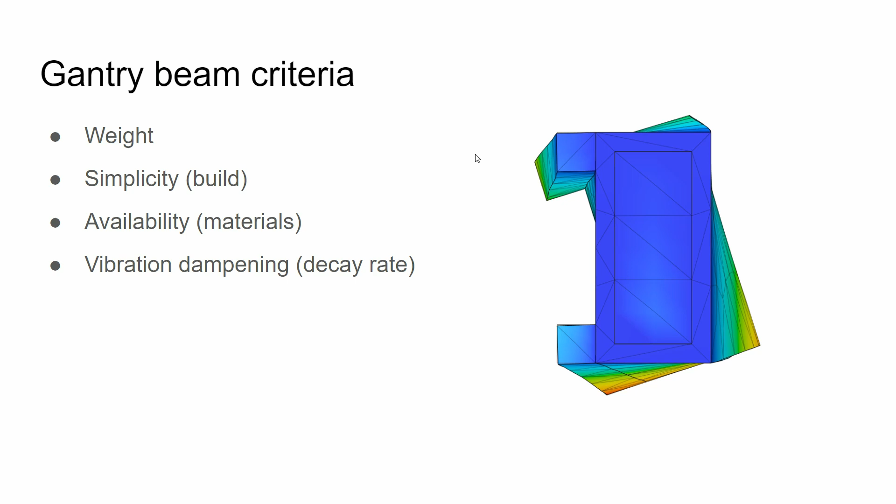Alright, the beams we're going to design today are the four most interesting beams, I think - perhaps there's one more that's pretty interesting. I've already designed all the beams, but I just felt like showing you how I did it and how I went about it, so that you can simulate your own beams as well.

You can see that all the beams, right now we're looking at the cross sections of the beams. All the beams have rectangles, and these rectangles represent linear rails, and they are 20 by 20 millimeters. And all the materials are aluminum, and this right here is epoxy granite.

Talking about materials, for beams that require some sort of processing, like drilling holes to install the linear rails, I'd like them to be aluminum because it's cheap and it's easy to work with, especially for us hobbyists at home. Alright, let's get to it, let's jump into Fusion 360.

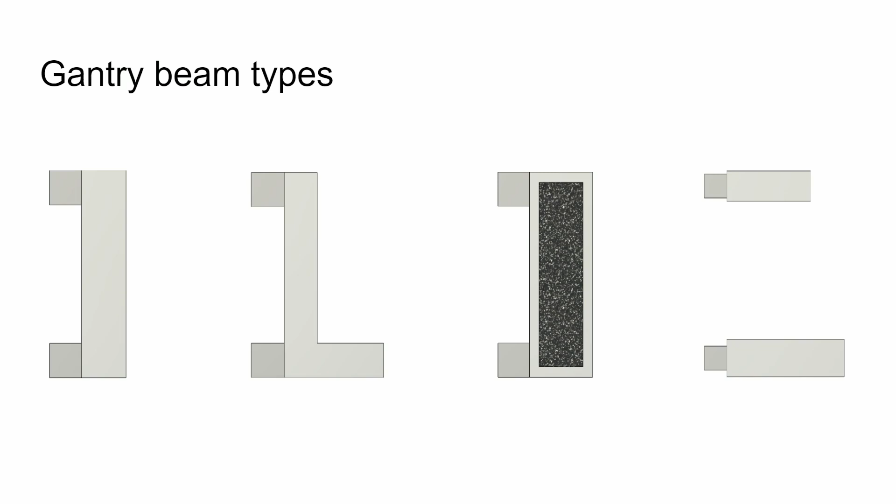Okay, I've gone ahead and saved the file, and we are ready to start sketching. So I'm just going to go ahead and draw the cross section for the first beam.

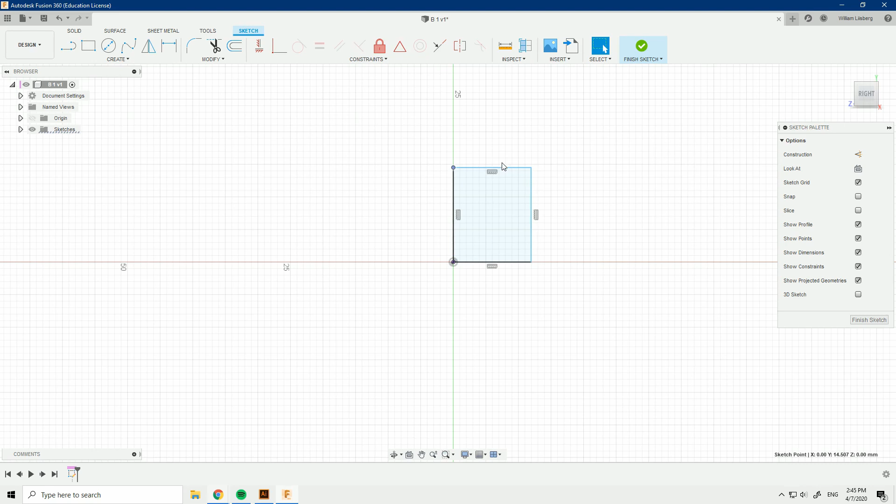One important thing to note, a little tip, is to create your beams so that they are centered in the origin, so that you can mirror rails and other features around on the part without creating extra work planes. So I'm going to go ahead and find the center rectangle tool, and I'm going to draw the cross section.

And I know the dimensions, it's 120 by 20 millimeters - no wait, by 25 millimeters. Alright.

So another thing I forgot to say is that the dimensions for all the beams will heavily depend on the availability of the material. So that is also going to be a limiting factor in our design, because we wouldn't want to end up with something that we cannot buy.

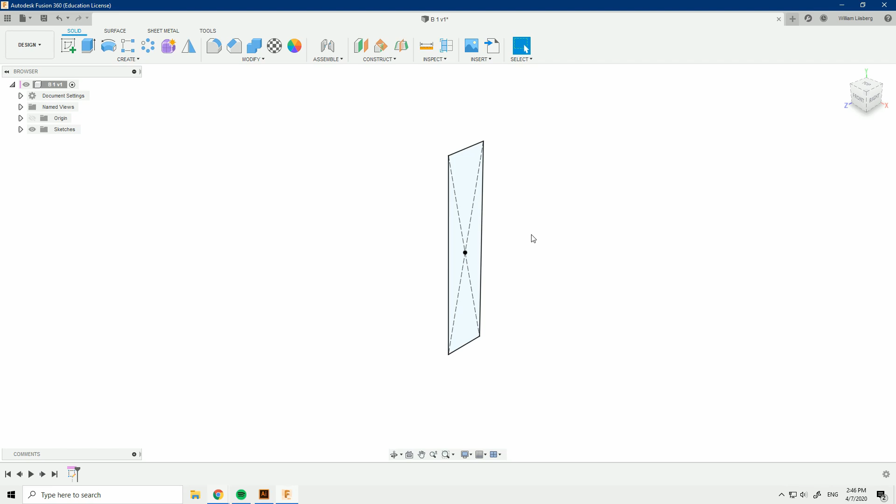All the beams are going to have a length of 600 millimeters, and remember that thing about making the part at the origin - well, we can actually create a symmetric extrusion, and first off it's going to be half of the length. That means it's 600 millimeters from here to here, which we don't want. We want the entire beam to be 600 millimeters, so I'm going to go ahead and press whole length.

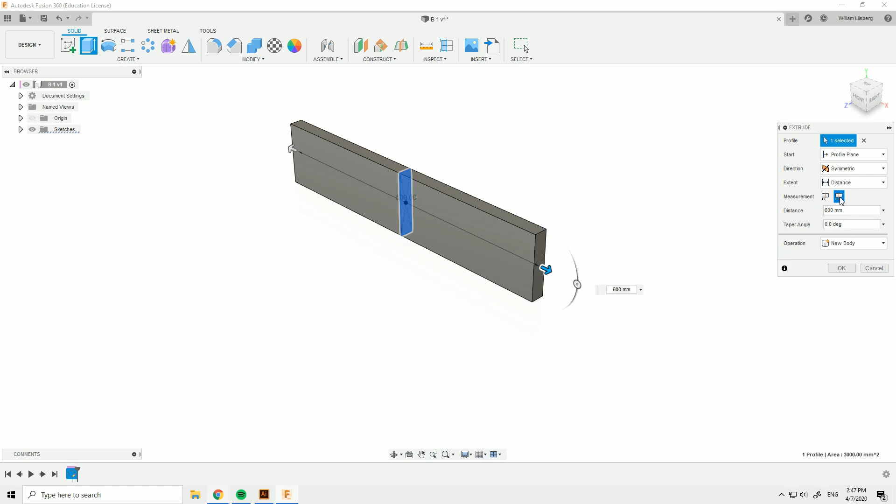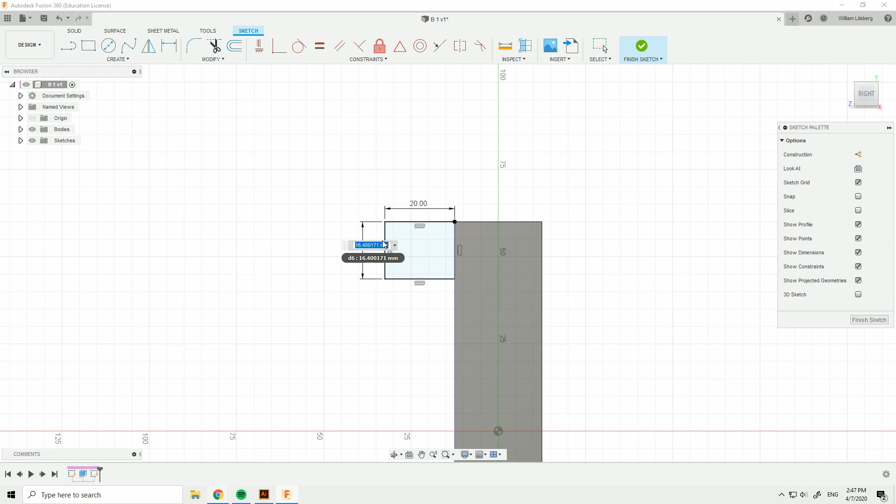Next up is modeling the linear rails. I know they are a bit simplified as rectangles, but for these kind of simulations, we are not looking for the exact result - we're just looking for something that's rather close to what the real world stiffness and deflection would be.

So I'm going to go ahead and extrude that, and instead of making this 600 millimeters, if I later on decide to change the length of the beam to 700 millimeters, I'd have to go back and change this as well, and if I forget that, we could have some kind of error.

So there's multiple things I could do. I could go back to our first extrusion. I could hover over this little text box for the distance, and as we can see, it gives us a variable name, that's D3. That actually means that if we enter D3, our value of 600 millimeters is stored in there.

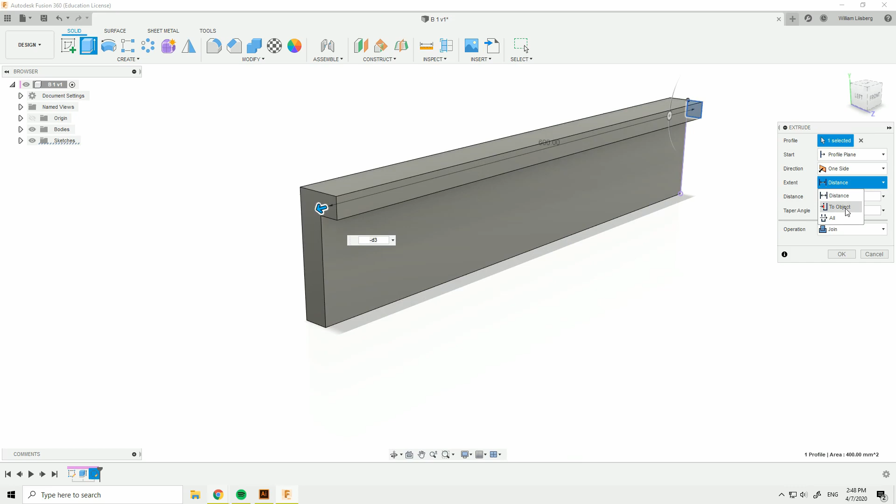So I could go ahead and extrude this one again, and I could enter minus D3 to get it in the correct distance. Another thing I could do is extrude it up to a face - that's usually what I do. So I'll just have to select the face right there, and it extrudes all the way 600 millimeters.

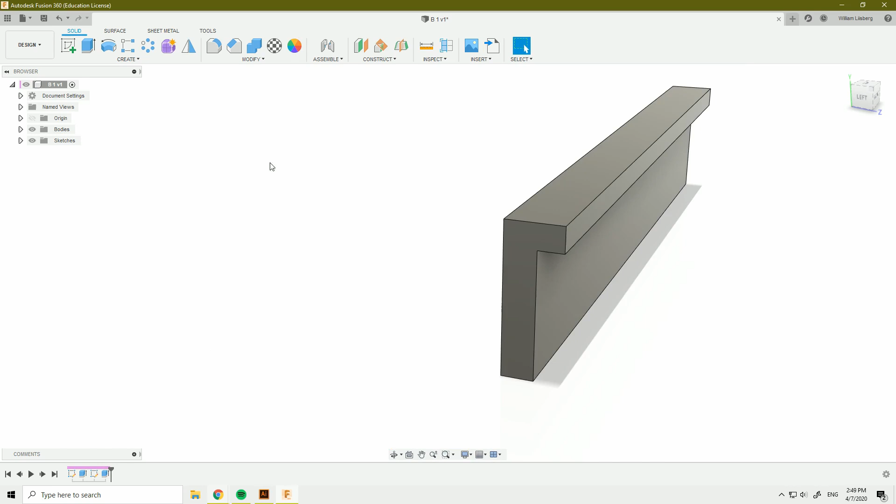And this will update as well if we decide to change the whole length of the beam. Alright, as you can see, it connects to the body, and that means that we cannot apply a separate material to our rail. So I'm going to make it a separate body by pressing new body under operation.

We need two rails, of course, so I'm going to mirror the first rail. I'll find the mirror tool, and usually the mirror tool goes to faces by default, so we can only select faces. We don't want that. We actually want to mirror the entire body, so we can select bodies, and now we can select the whole body at once.

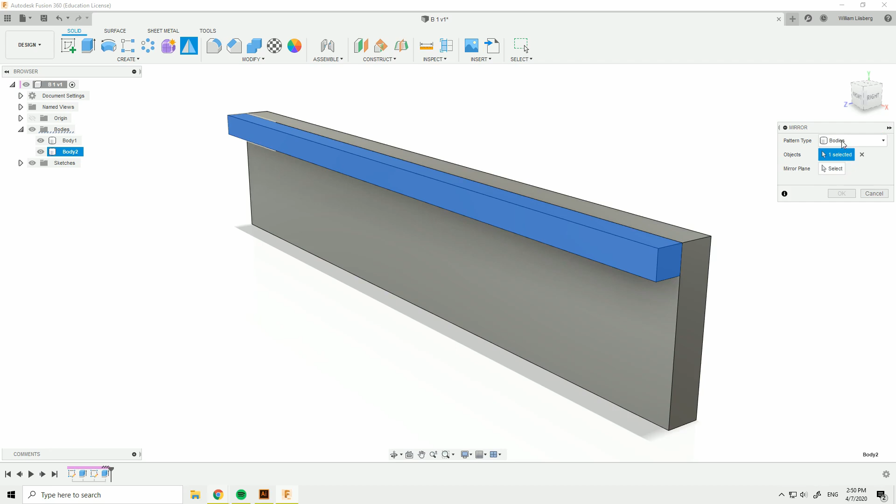One thing I prefer to do, which is also more efficient, is selecting whatever we want to mirror first. That could either be the body or the extrusion down here in our timeline. Now if I select the body first and then press the mirror tool, you can see it has selected bodies instead of faces automatically, and that saves us those two little clicks.

Alright, I'm just going to mirror that around the origin mirror plane, right there, and press OK. Now the first beam is almost ready.

We just need to apply our materials, and I've pinned my materials up here, but if you don't, you can find it under the modify section. If you press this little setting icon, you can pin it to your toolbar, and it should appear up here.

Okay, for the materials, we are going to apply stainless steel for the rails, for the linear rails. No, they're usually made of hardened steel, but the Young's modulus, basically the stiffness, is so close that it's not going to matter that much anyways, so steel would be fine.

And then aluminum, I'm not going to select the default aluminum because I know what type we will be using. We will be using one of the most common types, and that's 6061 aluminum. And that's hugely popular because you can machine it.

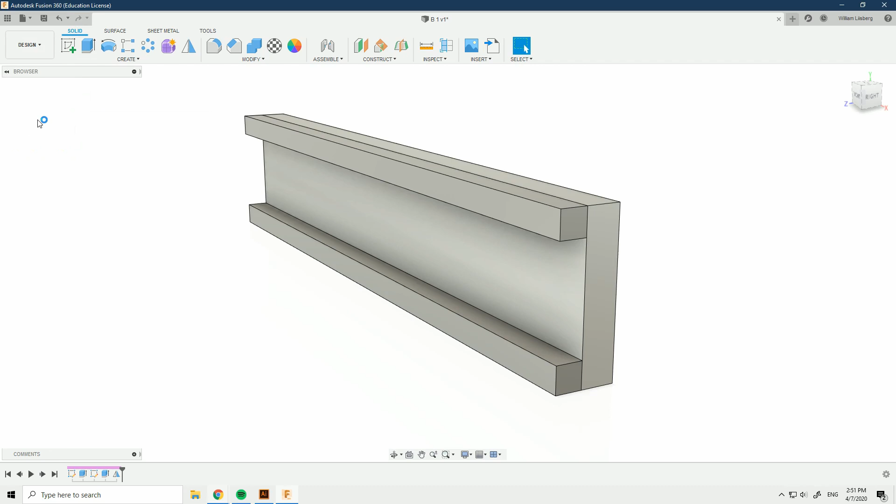Okay, now we are ready to insert the simulation workspace. And I will double click on static stress. That is the type of simulation that we will be doing in this video. And right here we have our simulation workspace.

Today we will mostly be looking at the materials section, the constraints and loads, and then the solve button, and of course the results, which gets us to a different set of tools in the toolbar.

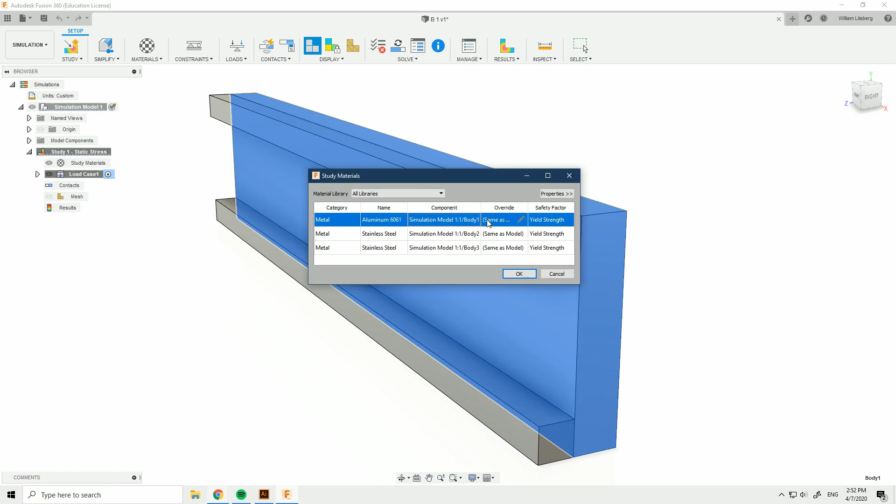Okay, if you're unsure that you have selected the correct materials, what you can do is go to the materials section, and you can actually also edit the materials right here. You should be able to do that. Oh, and we can see the properties. Didn't know that. That's really handy.

Yeah, so you could see that the Young's modulus for stainless is 193. For hardened steel, it's usually about 200, or perhaps a bit more sometimes.

Okay, I'm going to give this beam some constraints so that it behaves the way it would on a machine. And on a CNC router, these faces would be bolted to some sort of leg for the gantry. So we're going to fix those.

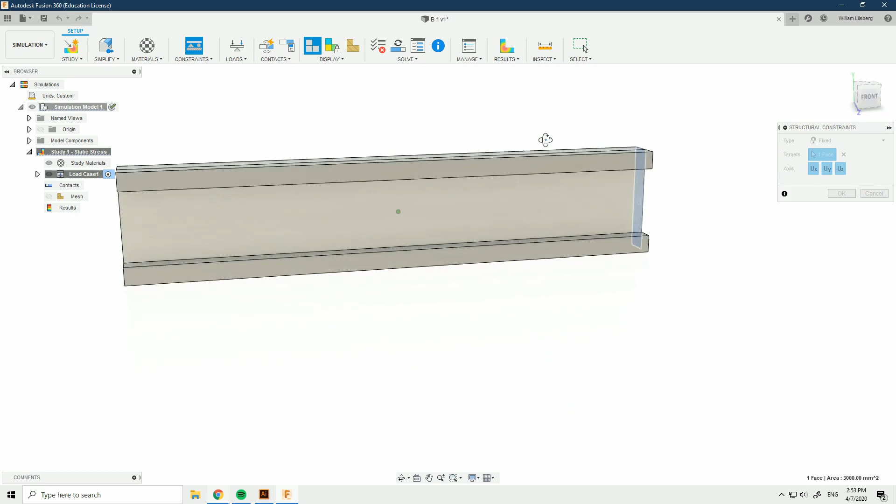And I'll just press the constraint, and then we can select the faces. As you can see, this little lock appears, and that means that it's fixed, as the type is selected right here. You have different types, but we're not going to talk about that today. I'm going to press OK, and now we are ready to enter some loads on this beam.

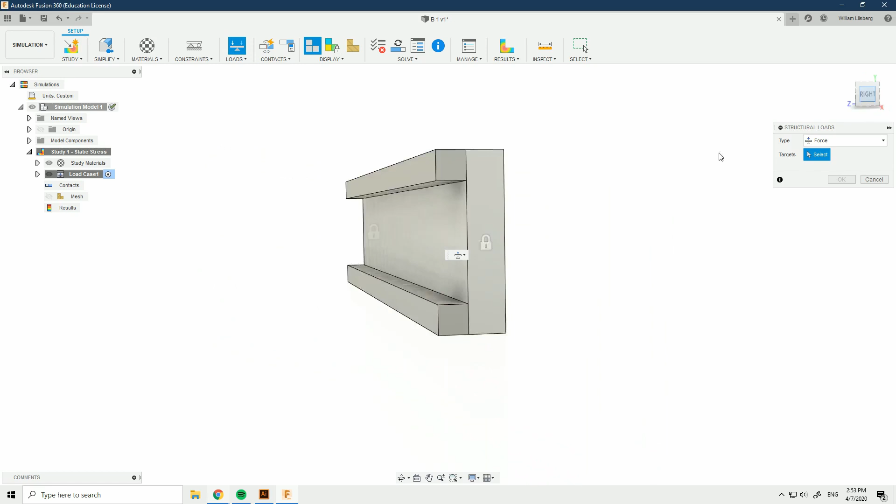Okay, if we look at this beam from the bottom, and if we put up some sort of Z-axis here, you can see that the load while cutting would come from down here. So we want to simulate that, because that induces some different kinds of stresses compared to just making the loads come straight on the rails like this.

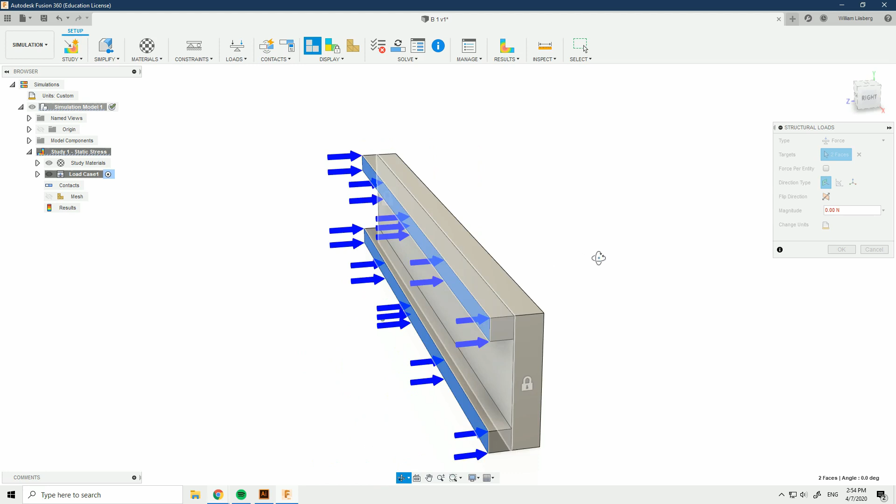So I'll select my two faces, that will be the linear rails that the force is going to be applied to in the real world. And then I'll select remote force, and drop it down 150 millimeters. The force we will induce on this beam will be 1400 newtons, and that is almost 140 kilos. So that's quite a lot.

Okay, now we have all our parameters and constraints entered, and we are ready to simulate.

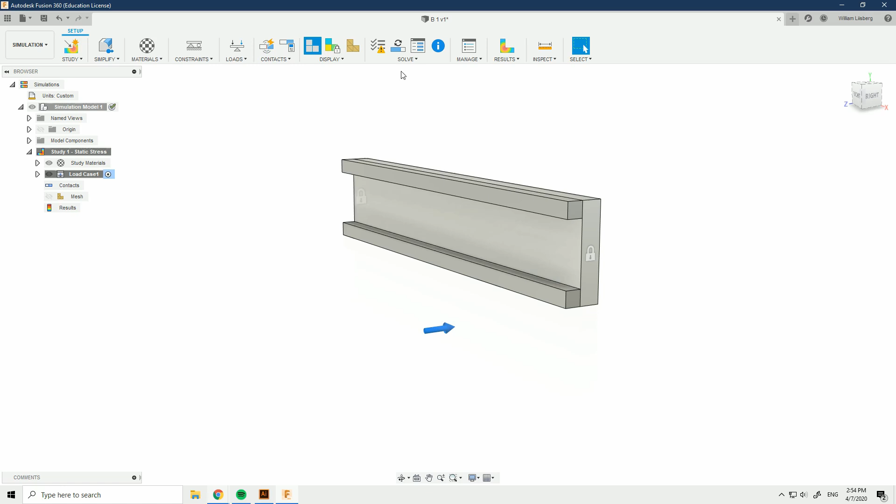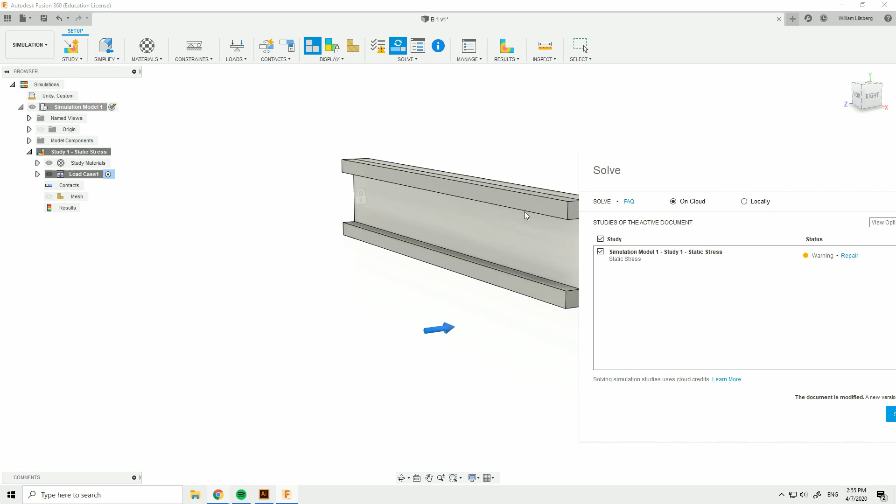I'm just going to go ahead and press the solve button, and this little menu appears, and you could either solve it locally or on the cloud. If you do it on the cloud, it's going to take a few seconds to send this model to a server and receive the results. But because this model is so simple, it's actually going to be quicker for me to solve it locally, and that might also be because I have a decent computer.

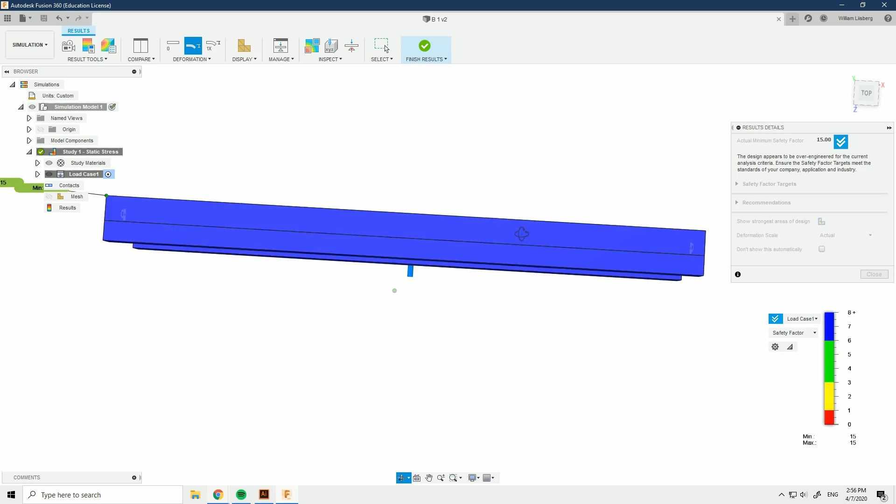When you have solved your beam, you will enter the results section automatically, and you can see our constraints and material section has disappeared, and we are presented with some new tools. The first thing that could be pretty handy is the deformation, which basically adjusts how much our beam would move under the applied load. This one is undeformed, and we have actual, which is how much it actually moves - that's hard to see because it moves so little. Then we have adjusted, which basically overdoes how much the beam deflects.

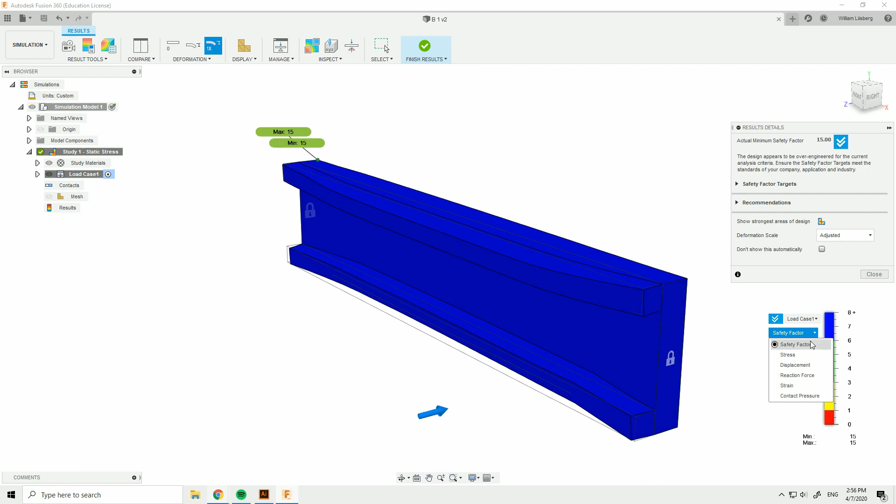Right now we're looking at the safety factor, but we don't want to look at that. We're actually mostly interested in the displacement, meaning how much the beam has moved. The first thing I note is that it's not uniform - I'm not sure what's going on there, but I'm not interested in the result we have right here with this probe.

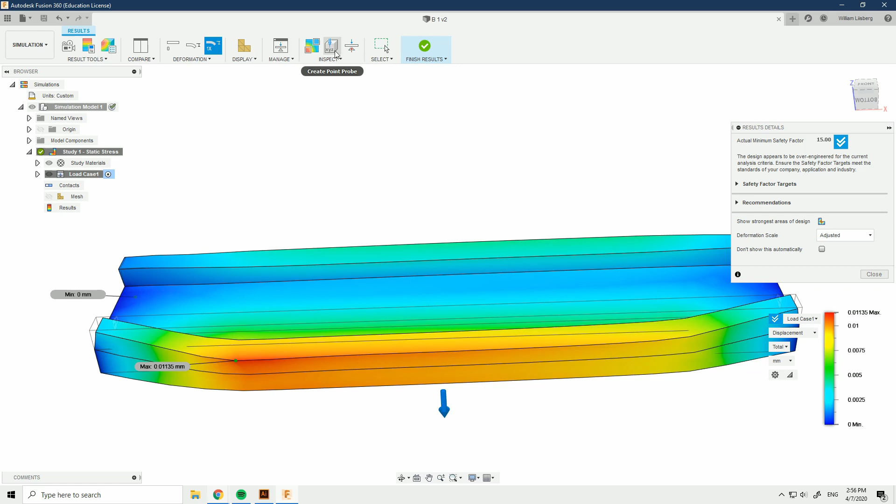I'm going to go ahead and create a new probe under the inspect section, and apply that somewhere in the middle of the beam, and there we have our number. We can see that under a load of 1400 newtons at a distance of 150 millimeters down from the center of the beam, we get a deflection of 0.01 millimeters.

Now this is where it becomes really interesting to have FEA available to you, and FEA stands for Finite Element Analysis, which basically means computer simulations, as we're doing.

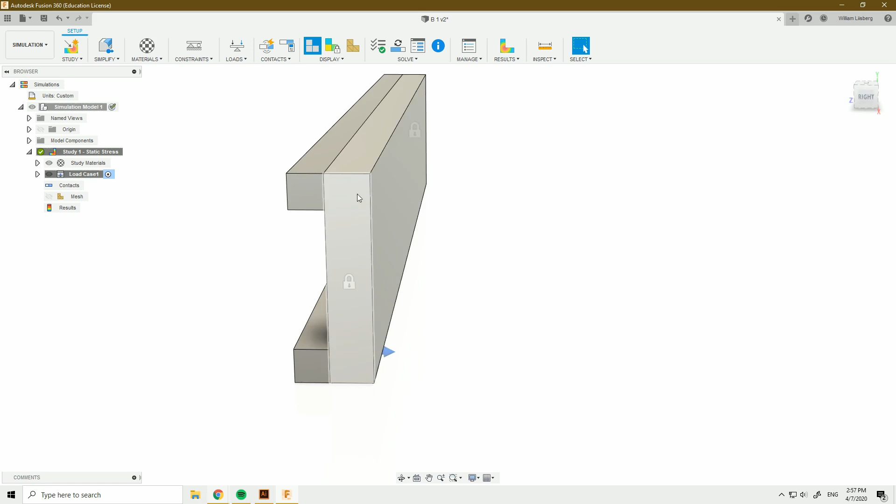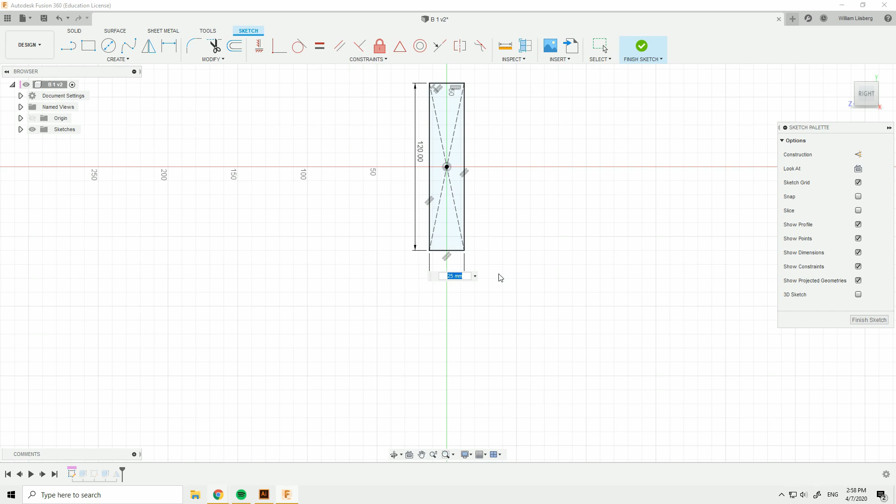This is really interesting because if you're wondering how much stronger this beam would be if we made it 5 millimeters thicker, you could easily do that by going back to the design suite and just change the thickness. Or perhaps we could make it 20 millimeters if you wanted a machine a little less capable but a little lighter and cheaper to build.

Then we could go back into the simulation workspace and resolve the whole setup. All we have to do is press the solve button again, because we have already fixed the two ends and our load is still here, the same, and still applied to the rails. So I'm just going to go ahead and solve this again. And there we go - now we can see that we have a little more displacement.

I believe this one has 0.003 millimeters more deflection, somewhere around there. So that's pretty interesting to see how much more deflection we get when we make the beam 5 millimeters thinner. Now I don't want to use this result, so I'm just going to go back in and redo what we had before - it was 25. I'm just going to simulate that again. And there we go, now we are back with our original results.

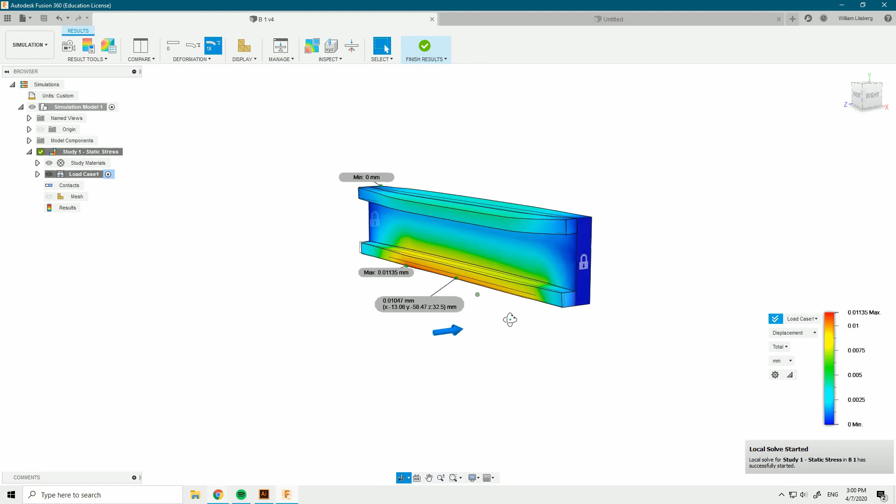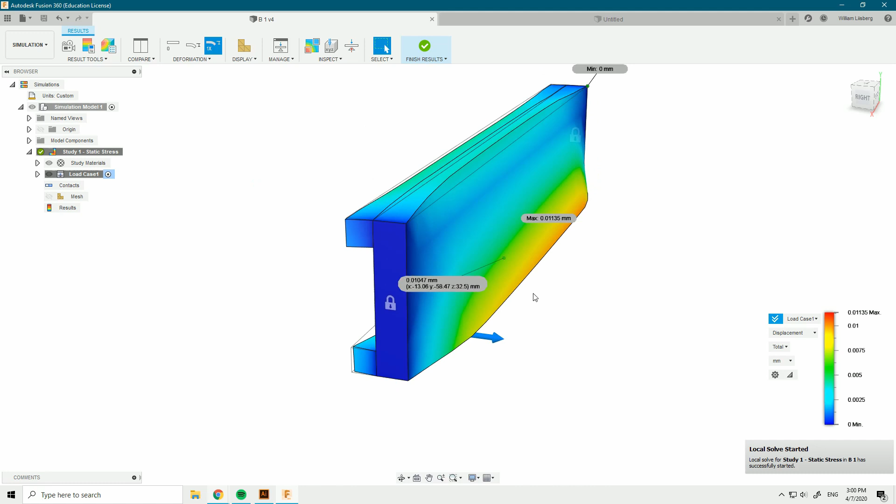Okay, let's go ahead and create the next beam. Looking at the first beam, I can see that we have a lot of displacement down in the lower area of the beam. So I think it would be really interesting to see what happens if we make an L shape, hoping that some extra material right here in the back would create less deflection. Let's go ahead and do that.

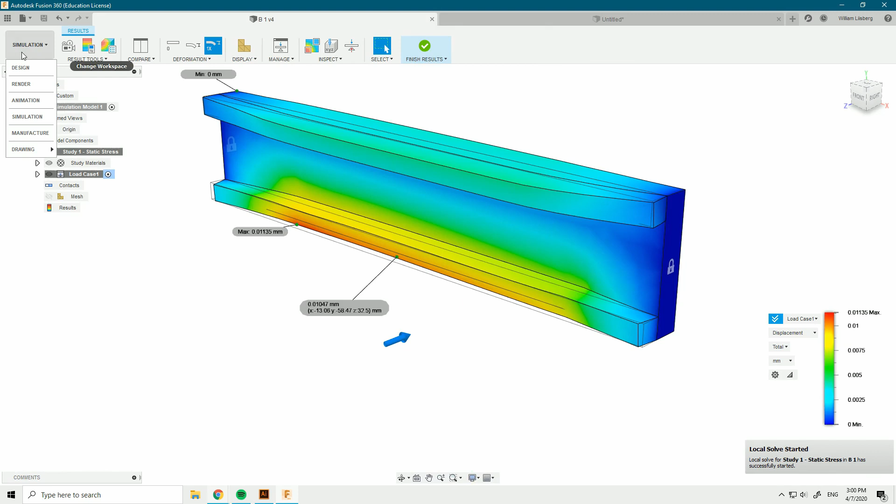Now, in order to make this fair, we are going to make it so that the cross section has somewhat of the same area as the cross section from the first beam. I'll go back here in the design, and I want to make this area the same as the area in the L shape. If I click on anything, a length or a face, I can see a measurement down here in the lower right corner, and it tells us that this has an area of 3,000 square millimeters. So we're going to aim for that.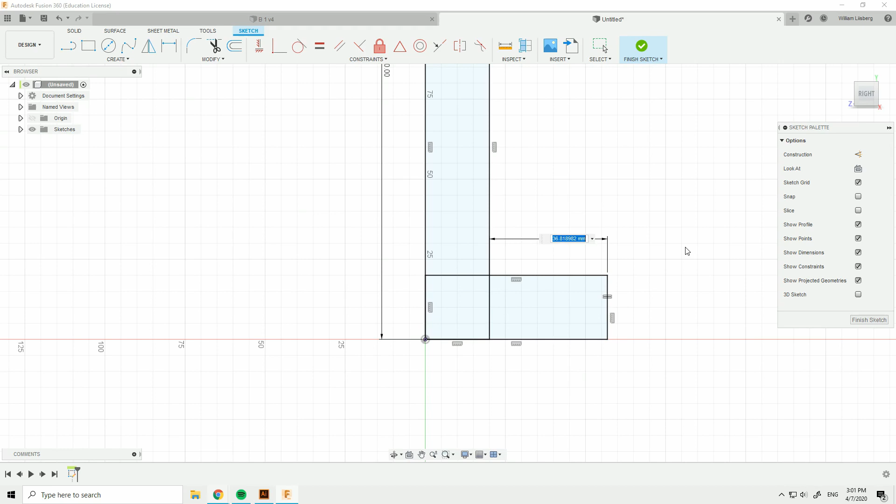I'll create the L from two rectangles, and I'll make both 20 millimeters. It should be 120 millimeters high, and we will make the bottom 40 millimeters. Where does that leave us? Let's see.

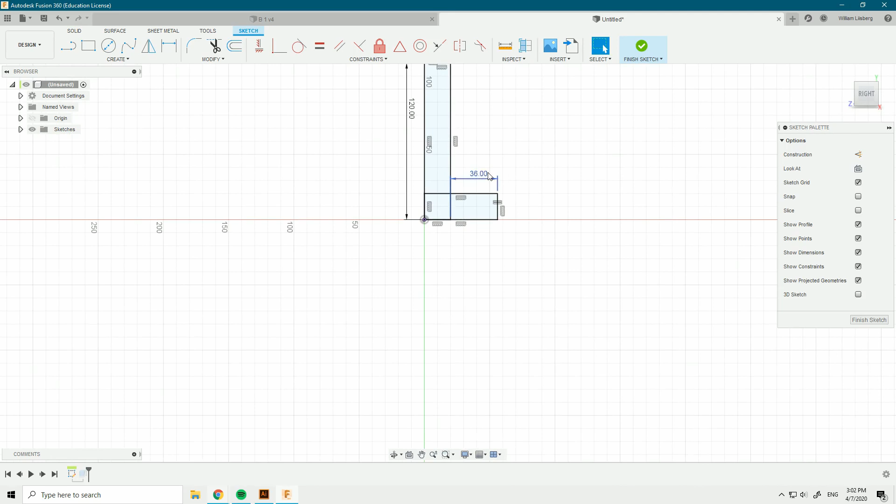This beam will of course be 600 millimeters as well, same as before. Now let's see the area for this cross section is 3,200. So perhaps we could make the leg of the L, if you will, a bit shorter. Let's try 36. A little better, perhaps 32 millimeters. Yeah, that's almost spot on, that's almost 3,000 square millimeters.

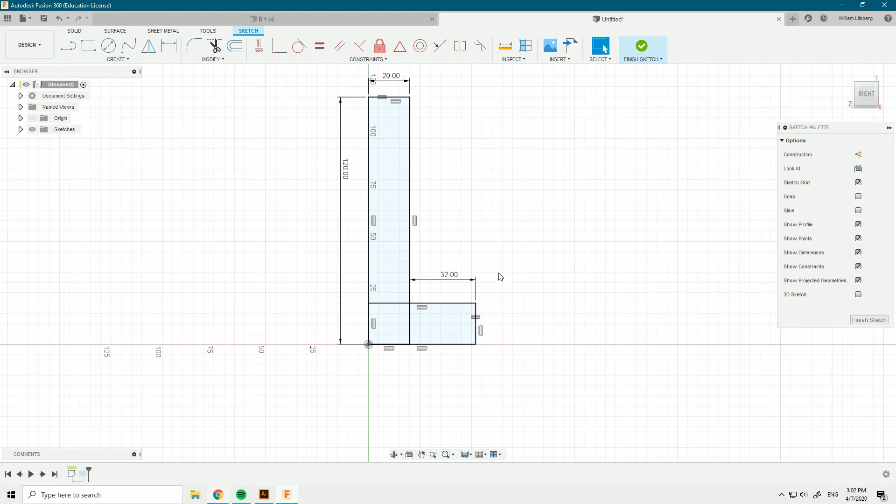Now I think this looks a little funky. I intuitively think that the bottom of the L should be a little longer. So what I'm going to do is make this a little thinner instead, and then make it longer. I'm going to delete our constraint here that makes this side equal to that side, and make it 15 millimeters, and then we can make this one a little longer again. Yeah, there we go, exactly 3,000 square millimeters. That's great.

Okay, I'm just going to go ahead and save this design as well. You cannot simulate anything unless you have saved it.

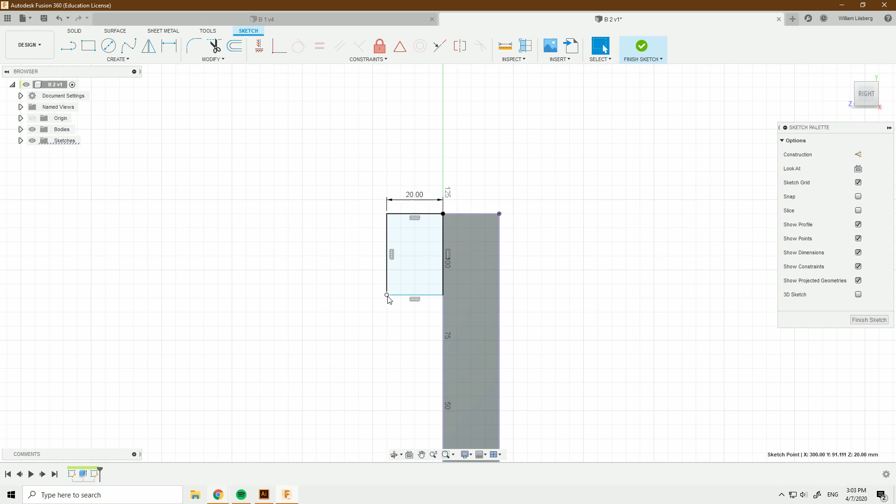Now we need to create our linear rails. I'll press R for rectangle, and I'll make this 20 millimeters. Now instead of making both sides 20 millimeters using the dimension tool, one thing that would be a little cleaner is to make the sides equal by using the constraints available up here. That just saves us a dimension, and then if we want to change this, it updates both sides, which is handy.

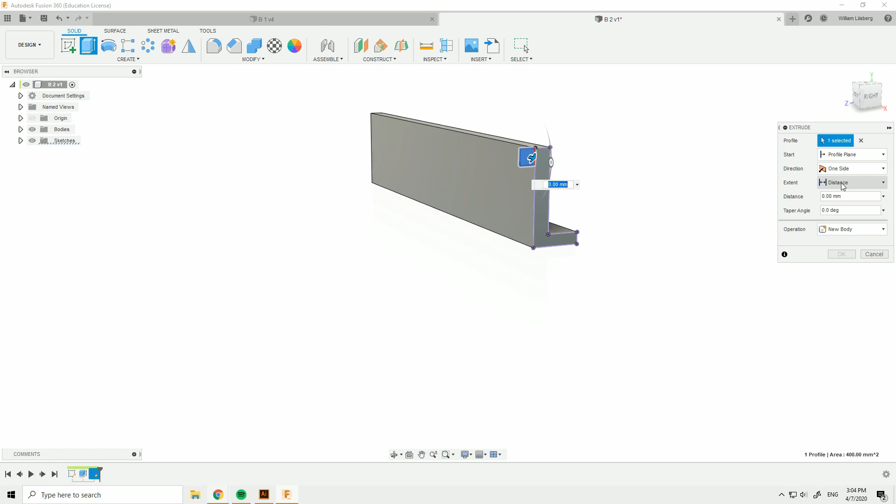Okay, now one thing I forgot to do is make it symmetrical. So our beam is not symmetrical, it's not centered on the origin. So if I want to mirror this part, I'd have to create a new work plane.

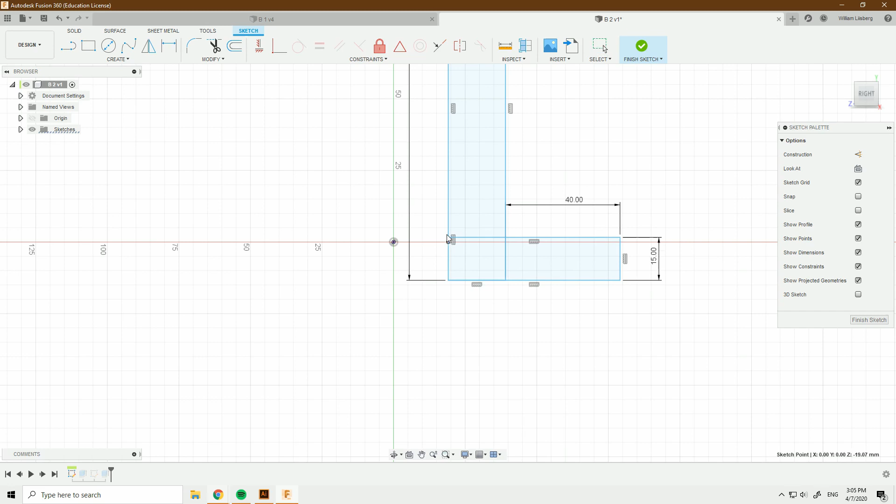I'm going to show you that. So what I'm going to do is go back into our sketch and make everything symmetrical. I'll just click on the origin here, and delete all these constraints. I'll select this, and reconnect what needs to be reconnected. There we go. And I'll use the midpoint constraint, which basically connects the middle of this line to this point. So we're going to use that, and go ahead and press OK.

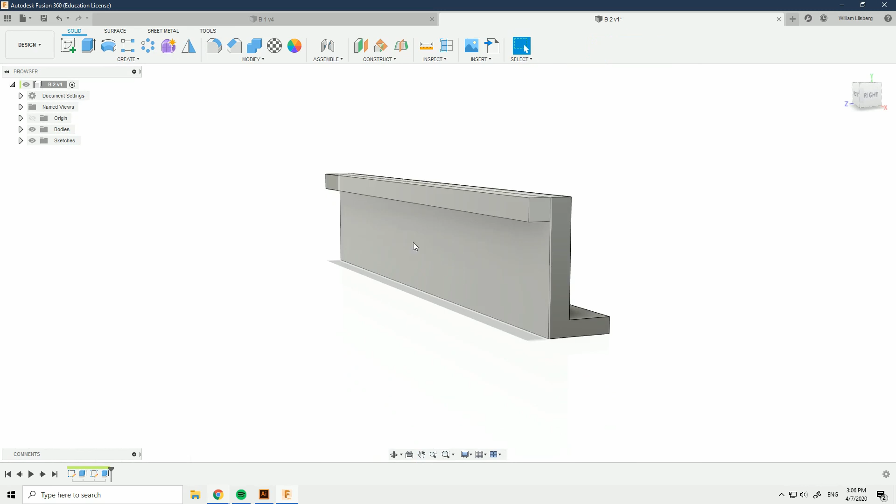Alright, now we can mirror our rail, and I'm going to select the rail before using the mirror tool, if you remember. And then I'm just going to select the correct origin plane.

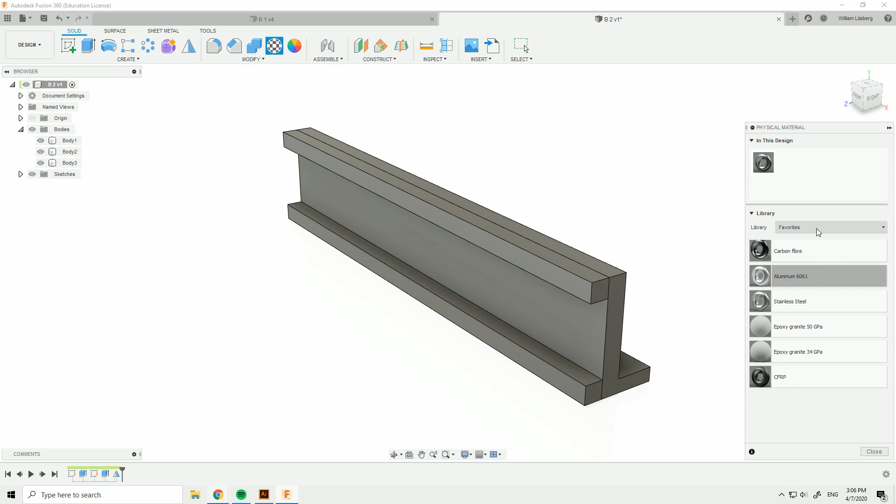Now we're ready to apply our materials. So I've actually saved our materials under my favorites library. I'm just going to go ahead and drag and drop the required materials and then enter the simulation workspace.

Okay, the setup is going to be the same as before. So I'll just fix the ends. One thing that is important to remember is that we don't want to fix the linear rails, because they're not going to be fixed to the legs of the gantry. It's hardened steel, so we're not going to drill and tap some kind of hole for a screw to go in. So I'll only select the ends of the main body of the beam.

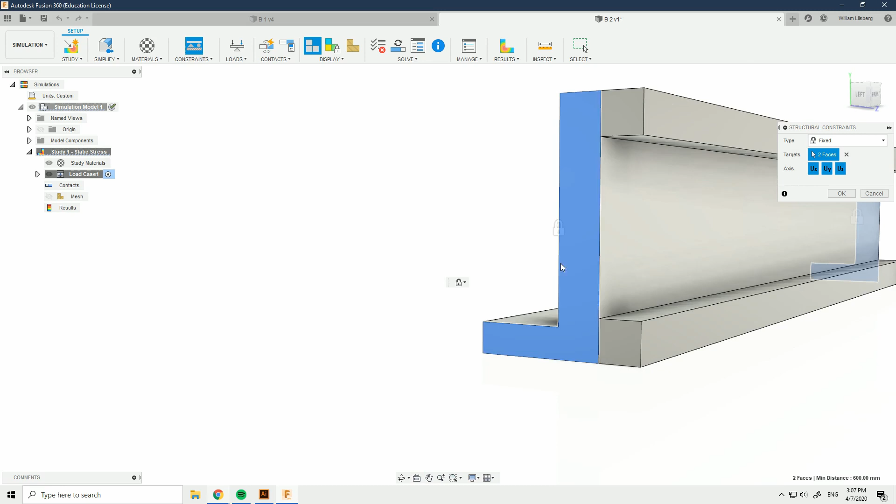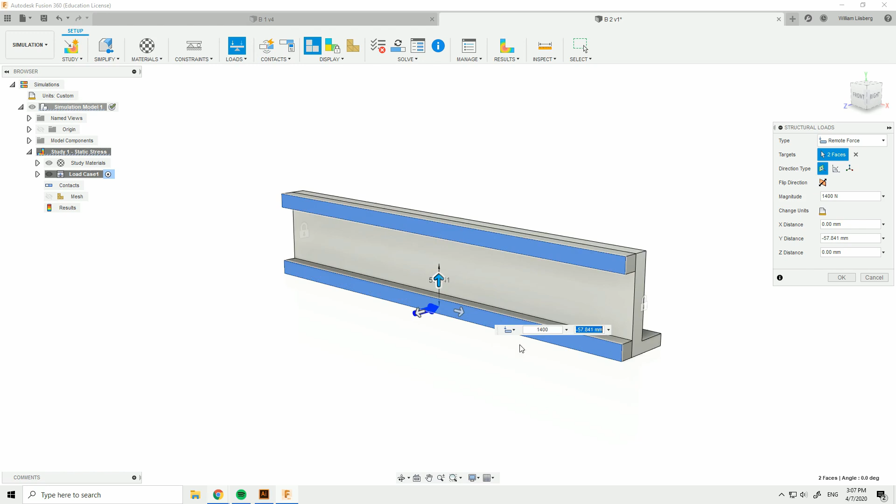And if you wanted to verify that we have the correct materials, you could check that in the materials section. I'll go ahead and apply our loads, and I'll select the rails, and make it a remote force, same as before. Remote force of 1400 newtons at 150 millimeters below the center of the beam. And now we are ready to solve.

Okay, now the next beam is going to be really interesting. The next beam will be a hollow profile, and it will have the same dimensions, 40 by 40, and I'll make this 10. Okay, this looks a bit weird, I'm going to make it a little wider. That looks more like it.

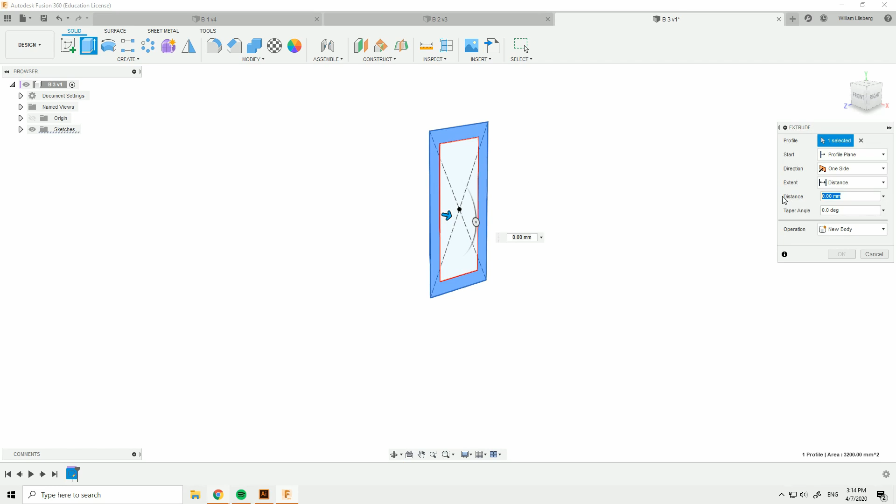This beam is going to be really interesting, because it will be filled with epoxy granite. And what is epoxy granite, you might ask? Well, epoxy granite is kind of like cement, but with a few different extras in it. It's a mix of materials blended together, and then they're held together with like 20% or 15% epoxy. And what this does is that it's really great at absorbing vibrations, which is very desirable for our gantry. So it's a quite good material for the application.

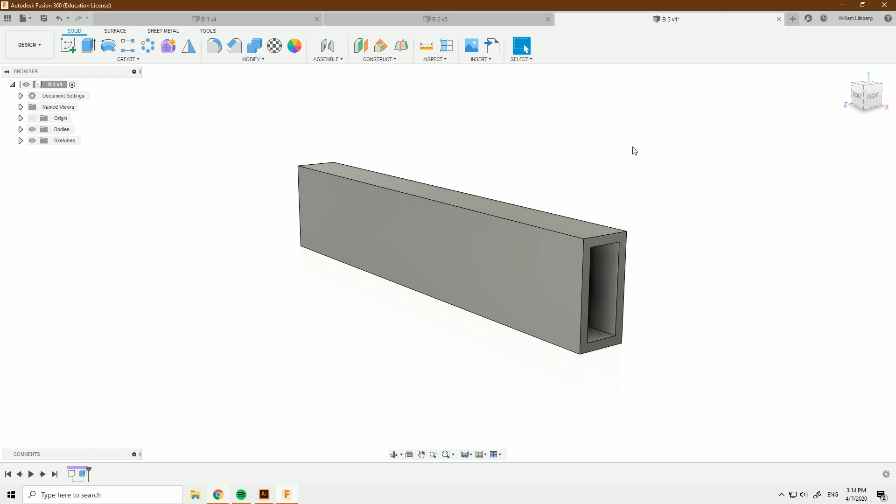Another thing is that the epoxy granite also adds a bit of stiffness. So I decided it would be a good idea to simulate a hollow profile, and then fill it with epoxy granite and see what kind of results we get.

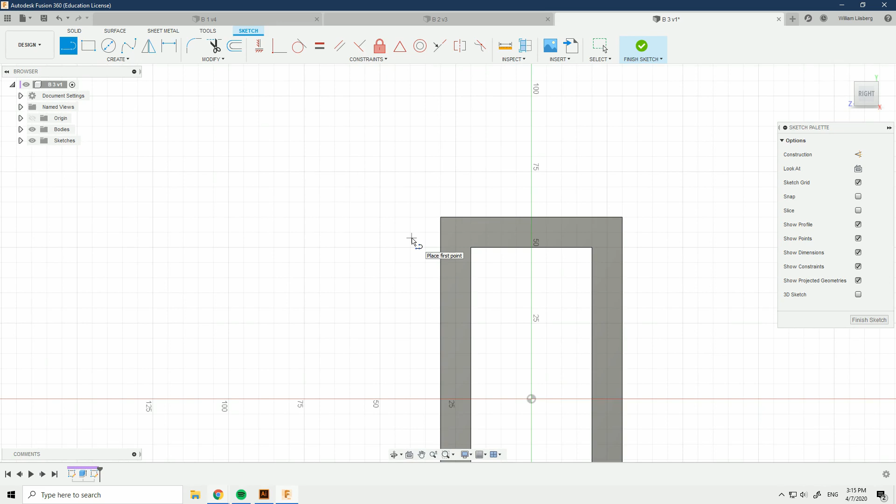So I'm just going to go ahead and create the linear rails as well. I'll make those really quickly, 20 by 20. Okay, and I'll just press Q from the sketch environment, and it throws us straight into the extrude tool. There we go, and I'll make it a new body. And now we can mirror it. I'll press the mirror tool. Alright, there we go.

Now we want to model the epoxy, and one thing many of you guys might do is just create a sketch and project the geometry to get this section right here.

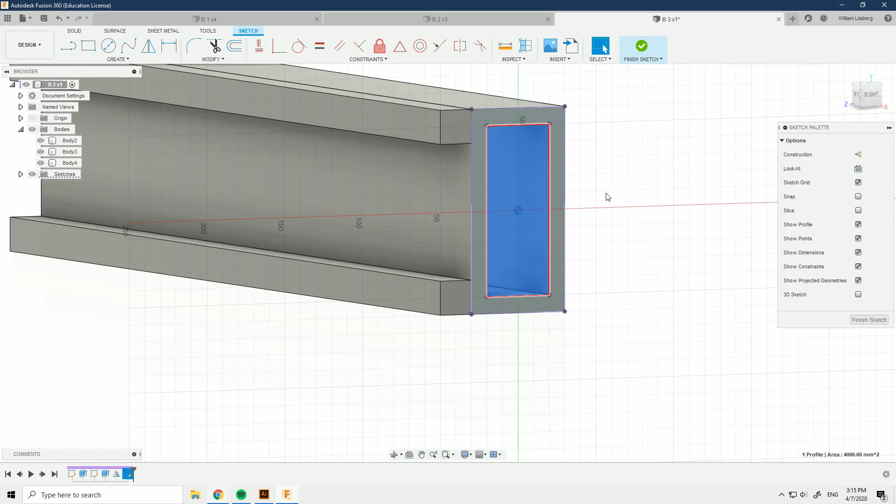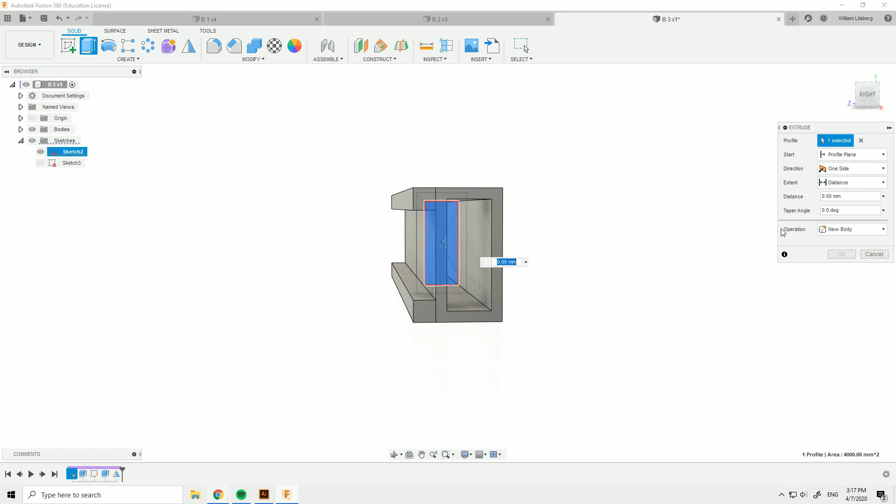Another thing I would suggest is to reuse our first sketch by going under the sketches and pressing the visibility icon to make it reappear. Then we can select it and extrude it up to the end, making it a new body. We actually wanted to extrude up to both ends, so I'm going to select symmetric.

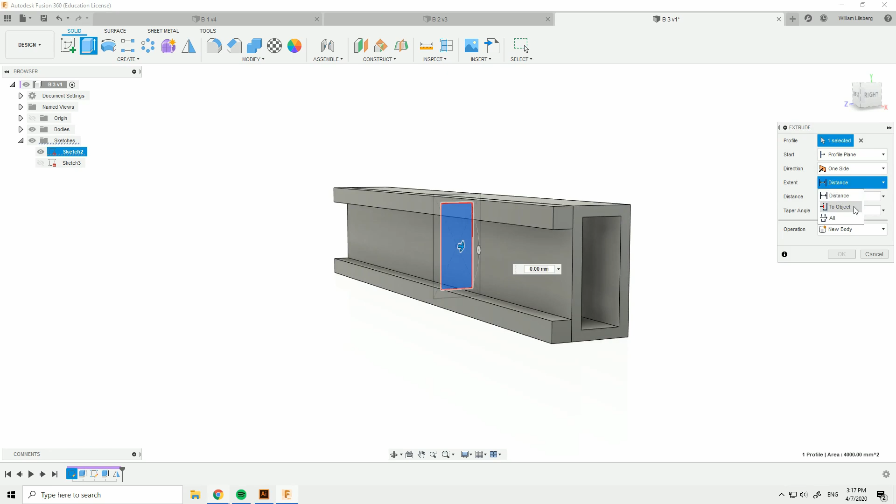Another thing you could do instead is go in and extrude, selecting the first face right here. You could select 2 sides, so extruding to 2 sides instead of symmetric. Then it asks how long the next side should be extruded, and we want to make that up to a face as well, that face being the other end.

So they're both eligible solutions. The last one with 2 sides is usually more for a different scenario, but it works as well right here. Usually I just go with the symmetrical, that's a bit faster. Then we can go ahead and apply our materials.

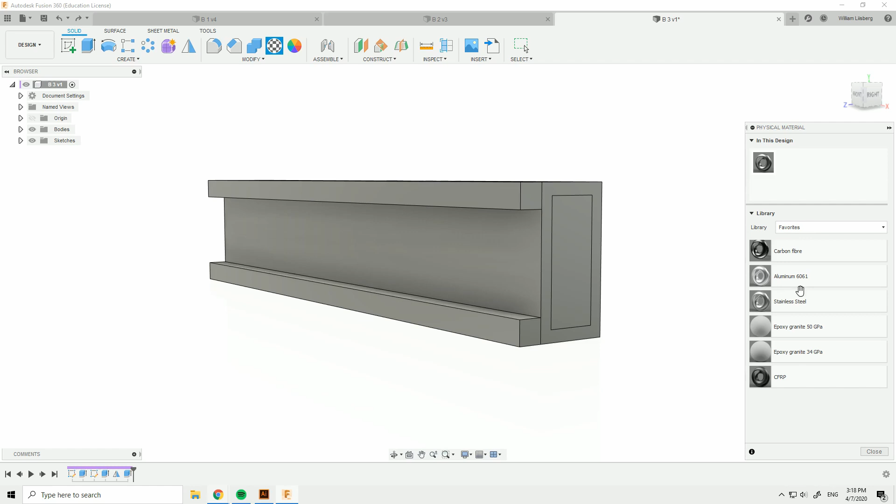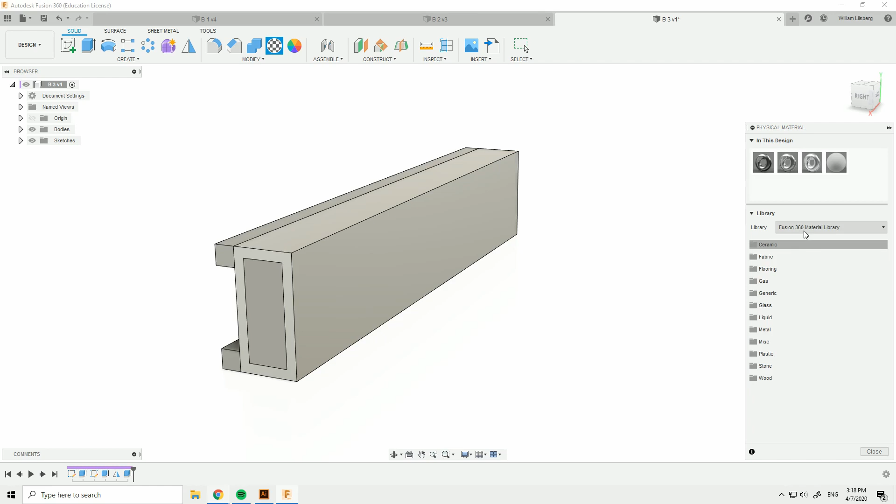Now you're probably wondering whether or not you can apply epoxy granite, and I'm going to tell you that it's not a part of the standard material library. Like you can see right here, you will not be able to find it. They do have granite, but not epoxy granite. So what I've gone ahead and done is created my own material.

If you want to copy my epoxy granite, you can do that by going to modify and then manage materials. What you'll have to do is copy any material from the Fusion library and add it to your favorites, and then when it appears in the favorites section, you can edit it. You cannot edit it if it's part of the Fusion library, it will not allow you - they're all locked.

Now when your material appears, you can rename it or whatever, and then double click it to enter its properties and adjust the appearance. What you want to do is go to the physical properties and expand all of these, and then you can just copy what I've got right here.

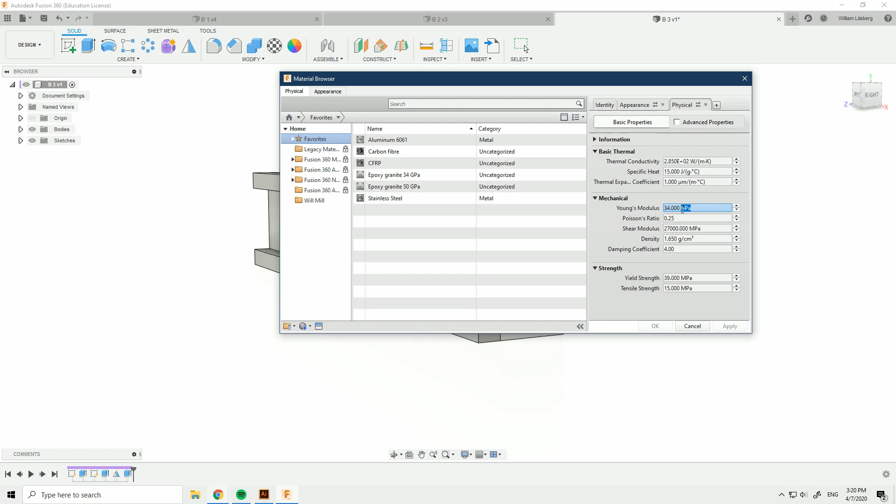Now if you're doing static stress simulations, the only thing you're mainly going to be interested in is the Young's modulus, this property right here, and that's a property that affects the stiffness of the material. It describes the stiffness of the material.

Another handy thing to enter could be the density of the material, if you want to calculate the deflection to stiffness, the deflection to weight ratio. I'm not sure if that's a legit ratio, but that's what I use to determine what design is the best. We'll talk about that in the next video.

Alright, enough about that. Another thing - epoxy granite, some kinds can be a bit stronger than others, and that mainly depends on how well you mix it up and how well you fill it into your cavity or profile or whatever. But I've read on forums that the maximum strength you can get with epoxy granite is if it has...

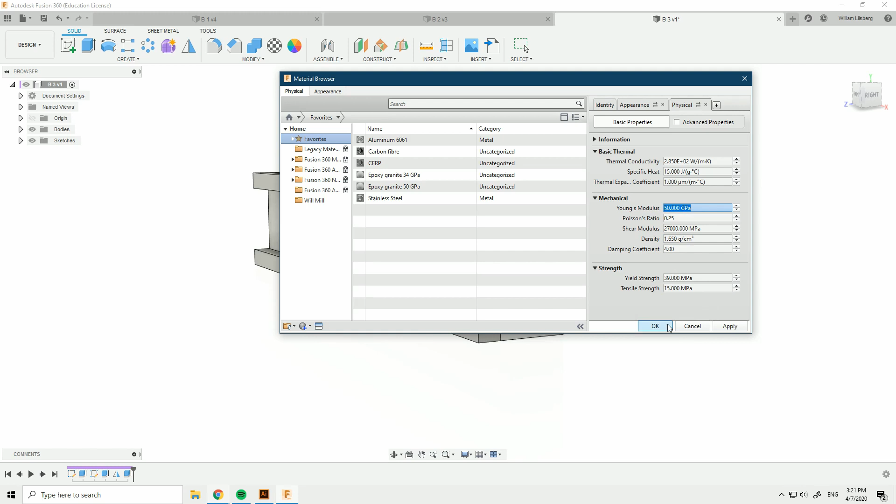A Young's modulus of 50. So I'll make mine 50, and then press apply and OK. So we're being a bit optimistic, using the stronger kind.

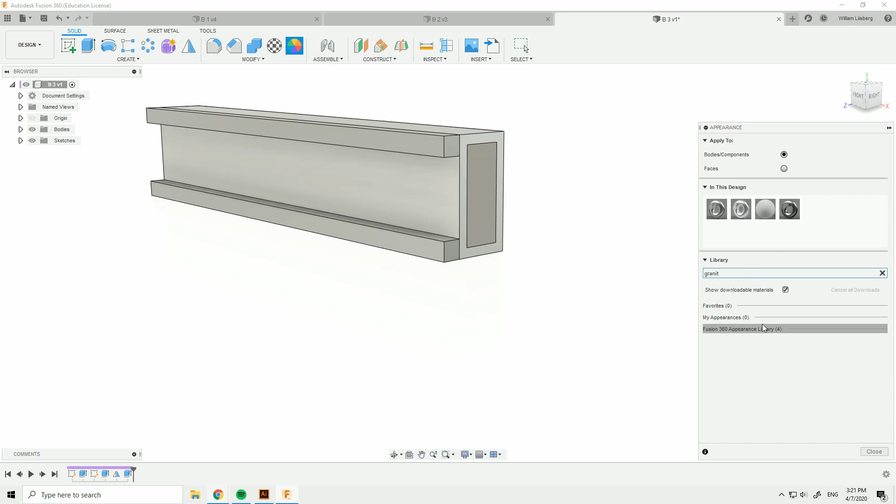Okay, now it looks a bit weird, our epoxy granite is just grayed out. That's just because I'm too lazy to give it an appearance as a material. So I'll just select granite from the Fusion library and apply that. If we set it at a scale of 25, it looks a bit better than it did before.

Okay, finally, now we are ready to enter the simulation workspace, and I'll go ahead and give it some constraints. Important thing to note again is that we don't want to select our epoxy granite - we will not have our epoxy granite mounted to the legs of the gantry. If I go under the materials section, you can see all the properties for our materials that we are using.

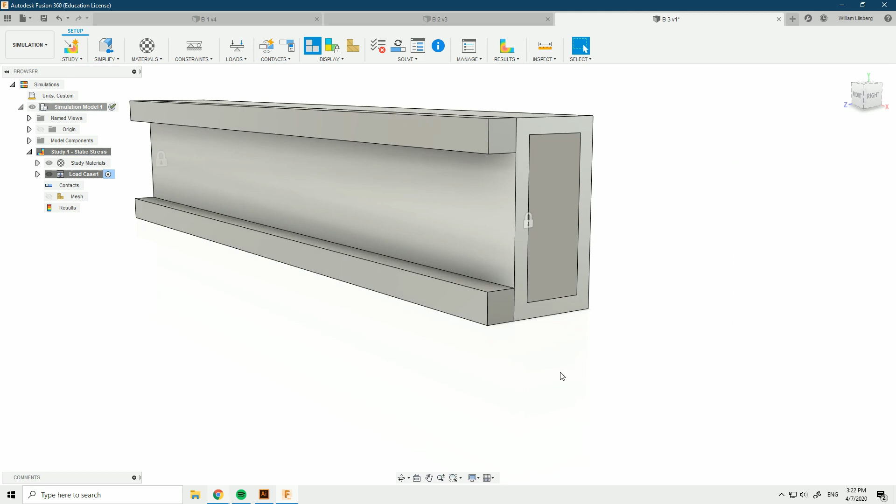Okay, let's go ahead and apply our loads: 1400 newtons, minus 150 millimeters, and now we are ready to solve.

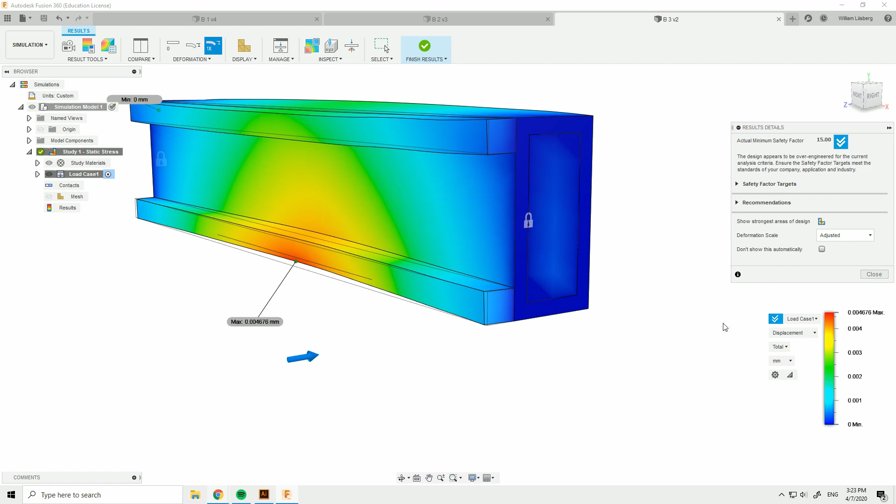Okay, we are in the results section once again, and I'm going to look at the displacement. Okay, this is really interesting - we have a displacement of 0.0046. That's 50%... it's actually 54, wait, if we round that up it's more like 53% better than the first beam. But now don't get caught up by the fact that it's stronger, because we also have a lot more weight added to this beam, so obviously it would be stronger.

But what would be interesting is to take a look at just how much heavier it is compared to the first beam.

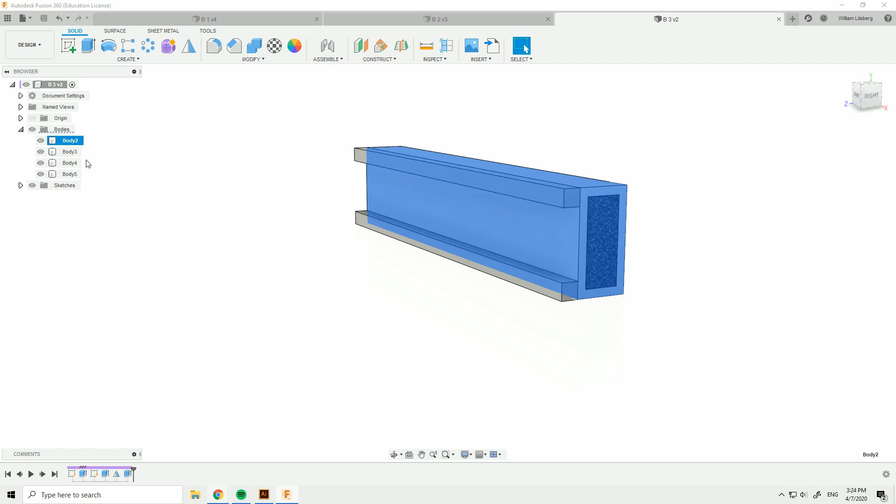So one might think, if it's 50% stronger, then it would weigh double. To get the weight of the entire beam, we can expand the bodies folder. Usually you can select all the bodies and go to properties to see the mass. I see it gives a weird number, so my way around that is to select fewer bodies to get a correct number. We can see 7 kilos for these two bodies.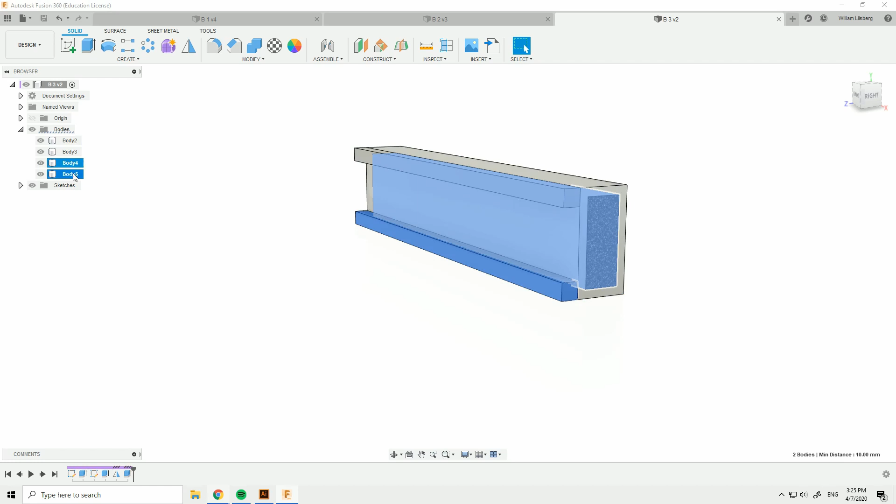Then we'll look at the remaining, and that's almost 6 kilos. So 7 plus 6 kilos, that would be 13 kilos. So that's actually not that bad.

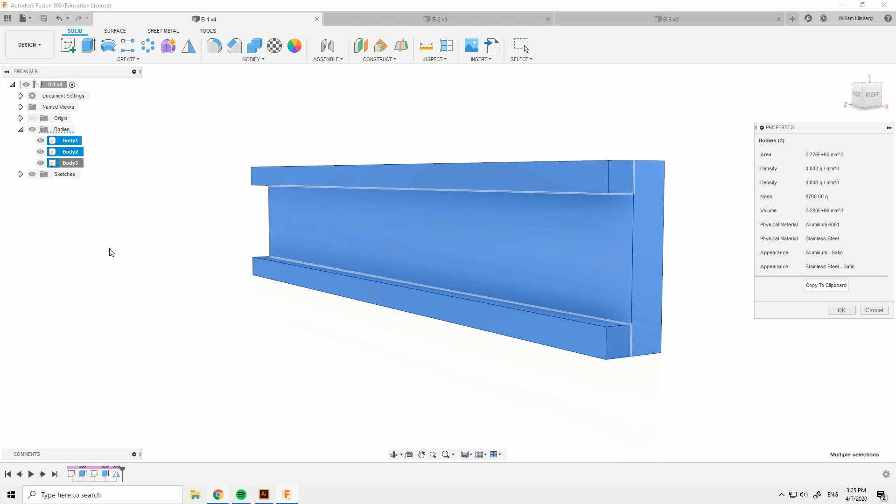Let's compare it to the weight of the first beam. This one weighs 9 kilos. So from that we know that this beam is a lot stronger, and it has a lot less deflection relative to its weight compared to the first beam.

So this would be a better option, but one thing to bear in mind is that it's also a bit more complicated to build, and the availability of tubes as thick as this one is not as great as just buying some slabs. These slabs are really common and easy to come by. So in more aspects, this one is harder to get your hands on.

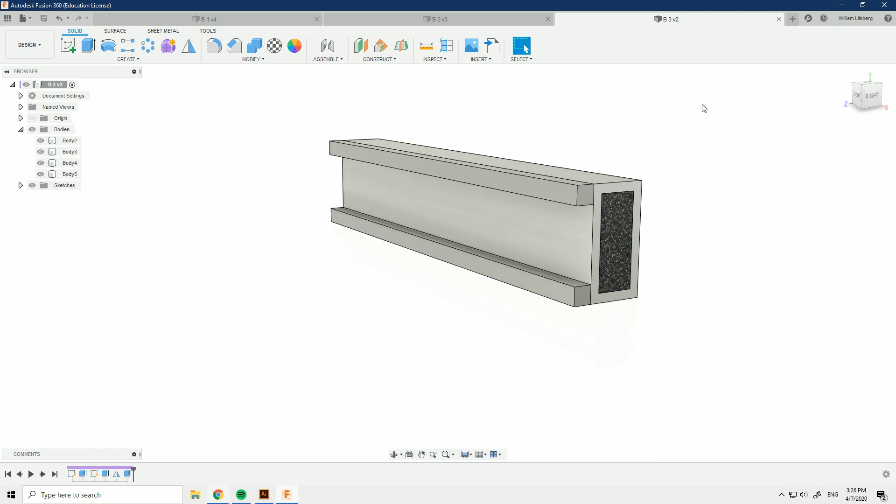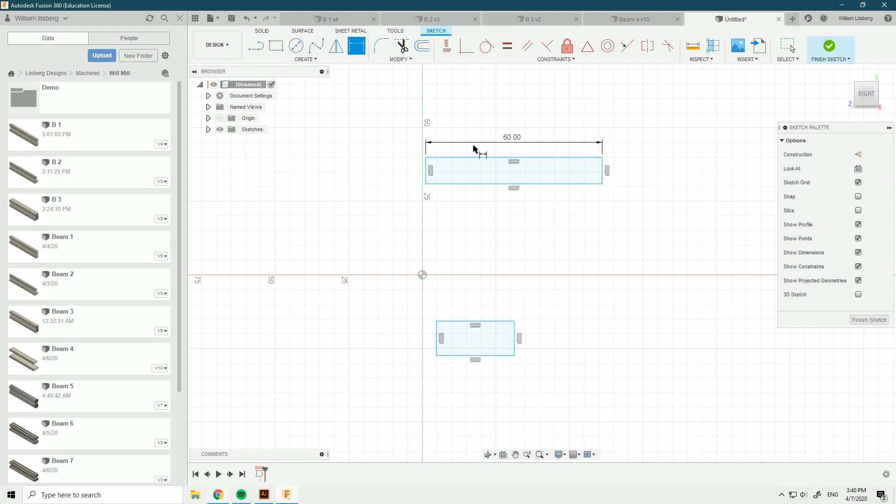But enough about that, let's go ahead and create the last beam for this video. Now the next beam is going to be really interesting, because it will be two separate bodies. I've already gone ahead and found the correct dimensions to make this have the same area as the first and second beam.

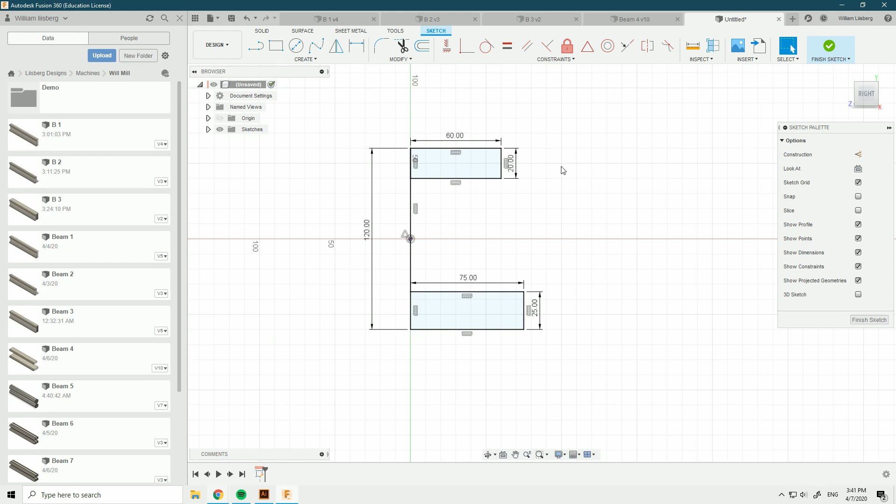So I'll enter these values, the bottom one 75 by 25, and we'll make the distance between those 120. Yeah, that looks about right. I'll make a line between these two corners, so that I can make the center point of this line join the origin. That basically means we have made it symmetrical, as we'd like. I'll go ahead and extrude these, making 600.

Okay, then we can make our rails. Now, if I've made this correctly, the distance from these should be the same, 47 something. And it's not. Okay, whatever, I'm just going to make both rails in one setup this time instead. I'll make the midpoint of this join that, and this for that, and we will make them 20 millimeters. There we go, yeah, that looks right.

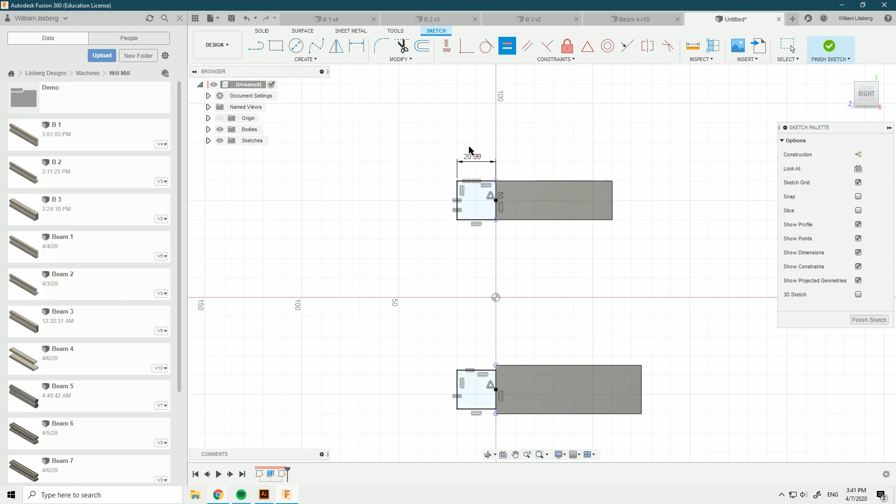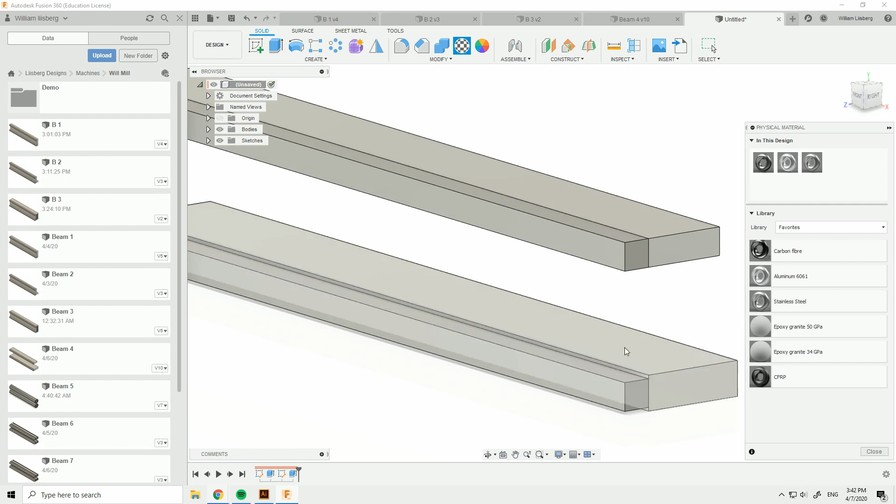And we can extrude both to the end of the beam. There we go, and we'll make them new bodies so that we can apply separate materials. So I will add aluminum and stainless steel, and we should be ready to enter the simulation workspace. Now remember, we have not saved our part yet, so it will ask us to save it if we press solve. I'll show you that in a second.

We'll just create our setup first. Remote force, 1400 newtons. Okay, there we go. Now you see, if I press solve, it will ask me to save it. Now I'll save it as beam number 4.

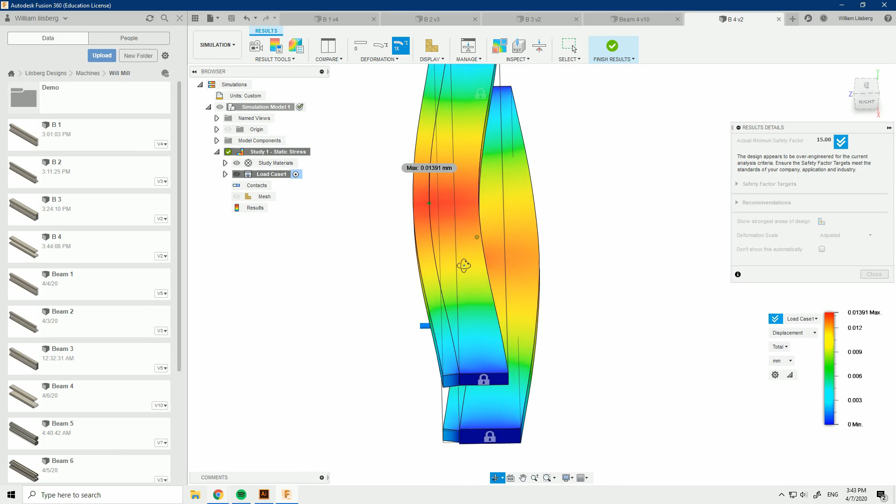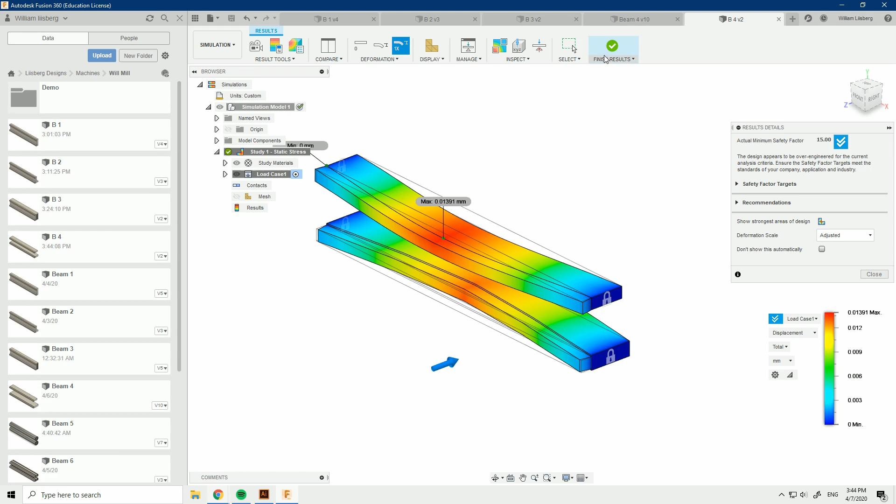Now we have our results calculated, so we will take a look at the displacement. What we will find is that we will have a displacement of 0.014. You can see it's at the top, but you can also see that the proportions are pretty balanced, the bottom one is almost red too. So let's compare this to the first beam.

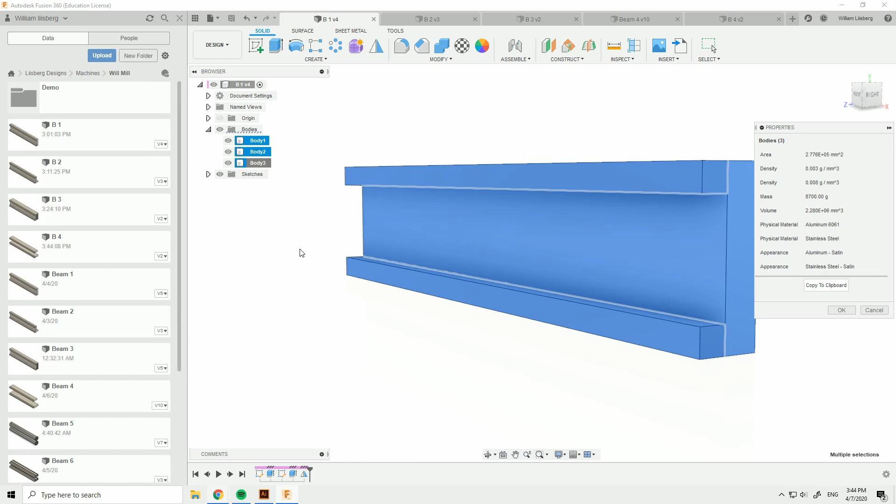Let's see how much it weighs. I'll go into the design section, and we can see that the whole thing weighs just about 9 kilos, and I forgot what this weighed. I'll just select these bodies, and this one weighed almost 9 kilos as well.

So if we go into the simulations workspace for this one, we can see that it has a displacement of 0.01, and this one had a displacement of 0.13, I believe - almost, actually 0.014. So that basically means that this design is really not that strong, it's actually weaker than this design relative to its weight. So now we know that we should not design our CNC this way.

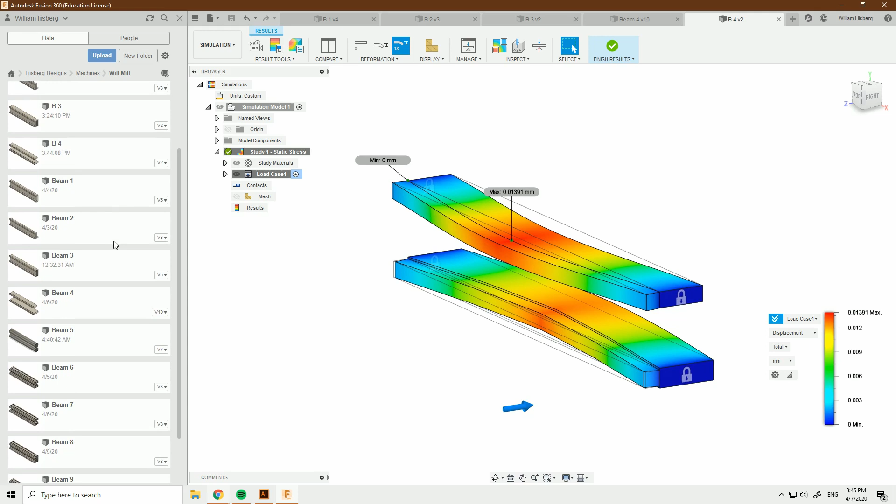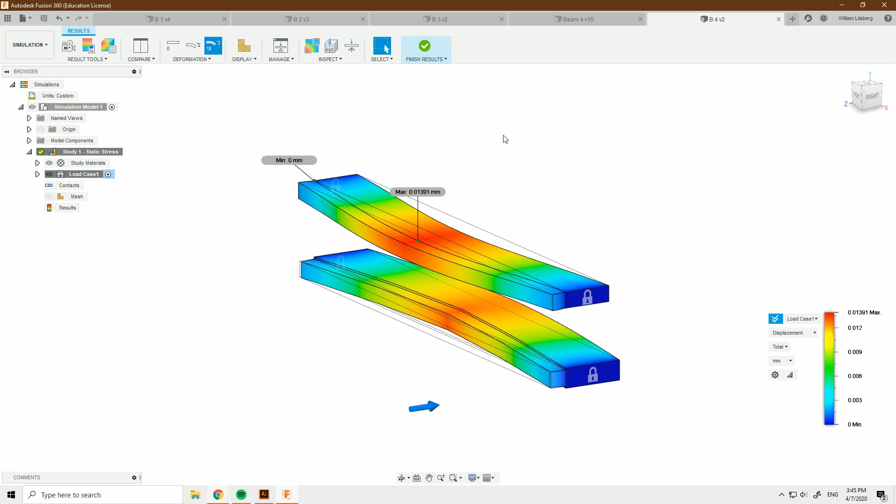Alright, that's actually all the beams we will be simulating in this video. Now off camera, I'm going to simulate a lot of different beams, I already have actually, as you can see here. Then in the next video, we will discuss the results, and then we'll pick some beams to create further variations of and investigate their design to find the optimal proportions. Alright guys, I'm looking forward to seeing you in the next video. Take care and bye bye.